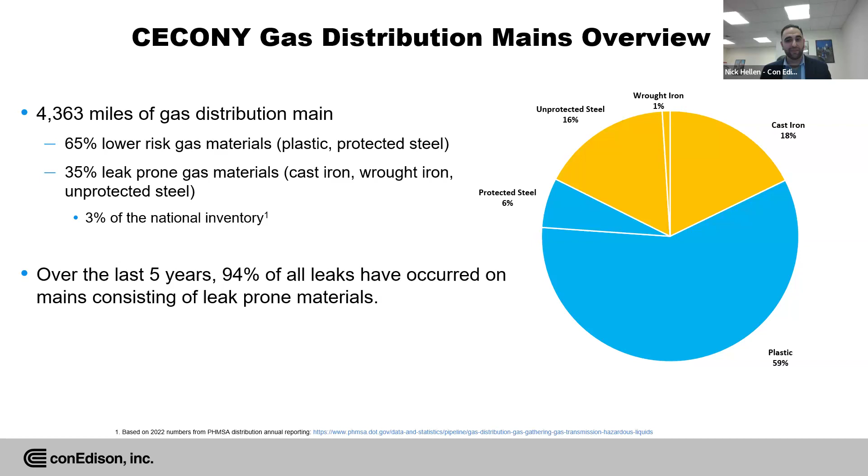So some regulatory context. We have the Climate Leadership and Community Protection Act, which was effective January 2020. Some of the major tenets behind that are we're looking to reduce GHG emissions 85% as compared to our 1990 levels by 2050. And then we're also looking to, by 2040, have 100% renewable electricity within New York. So you can imagine those are aggressive goals.

So a lot of what I'm speaking about is how we meet those goals within what's defined in our gas long-term plan, which was released last year. I did share the link for that. It has a lot of information in it. Obviously, I'm not going to cover all of it, but I'm going to cover some key points in the next 10 minutes or so. So let's go right to it.

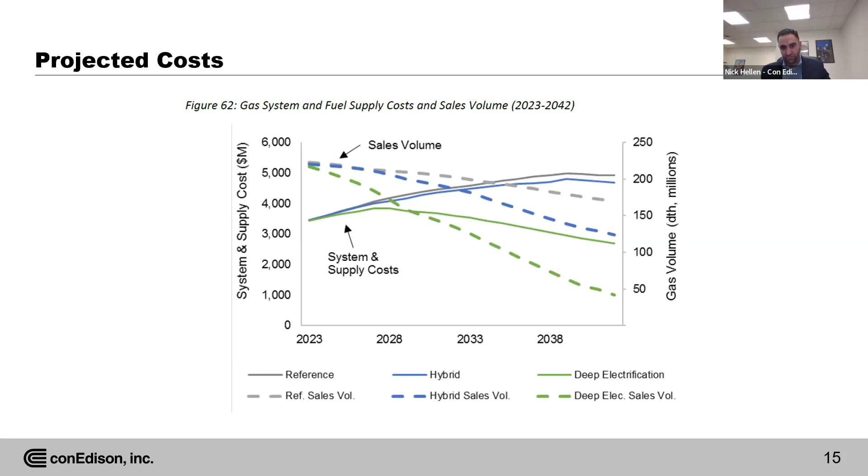Obviously, we can't do that to the remaining customers. So one thing we applied here is changing our depreciation rates from our current 2.6, approximately, all the way to 10.5, which allows us to collect on the rate base earlier in the process while the customers are still on the system. This is something all utilities need to think about if we go down one of these pathways and our customer base decreases significantly. I wanted to mention this as a potential tool - not the only one that could be used, but it was part of our conversation leading into this presentation.

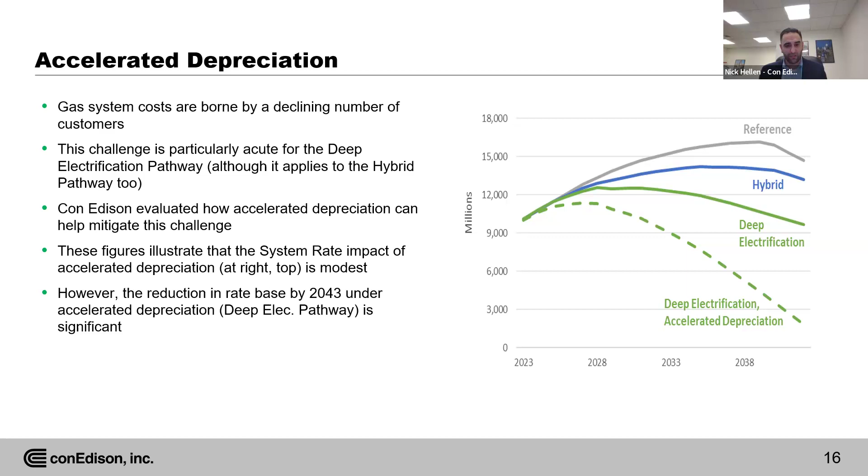So if we could go to the next slide. Another thing I wanted to bring up is NPAs - non-pipeline alternatives - and what tools we have to shrink the system. I want to discuss some of the tools we have today at Con Edison to do that. First, the process for NPAs is identifying our system needs, which is done through infrastructure planning. I'll bring up the two types of NPAs we have on the next slide.

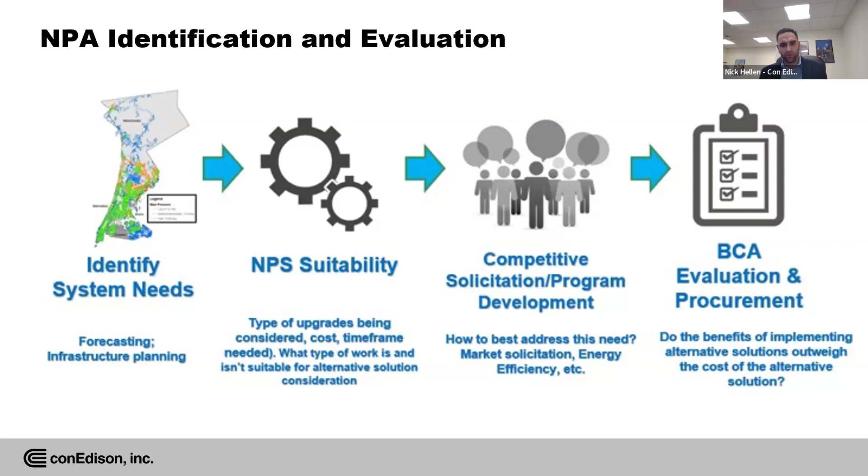After we identify our needs, we do what's called a suitability criteria - we look at how long it will take to actually implement the alternative tools and solutions for our customers. We put it through competitive solicitation and program development to determine how we best address this need. Then it finally goes through a BCA, where we weigh the benefits of implementing the alternative solutions versus their cost. Let me go into slightly more detail on the next slide.

So here are some existing NPAs we currently have at Con Edison. Our first is our gas main replacement program.

So we were speaking earlier about a leak-prone pipe. Instead of replacing a leak-prone pipe, we're offering incentives to those customers on that pipe to get off of our gas system and to be electrified. You see some of the tools and appliances down below with these nice pictures. We're really only targeting at this point radial mains that have a low number of customers, 1 to 5, because as you put more and more customers on this program, it'll be more and more difficult to not have to replace that pipe. So we do have that underway.

We do have a couple of successful radial mains that we're going to look to abandon with this program. But again, really small at this point. We're going to look to continue to develop that.

A larger way to look at NPAs is through our gas distribution system reinforcement program. Wherever we see a need to grow the system, for example putting in reinforcements, doing a retrofit on a regulator, doing some type of work — that's what we consider a traditional solution. Instead of doing that traditional solution, we go out to an area, and we have an example here.

This is the Soundview area in the Bronx. We're incentivizing customers to take both gas efficiency measures and electrification measures so that we don't have to do that reinforcement. So this is a way to kind of balance that out.

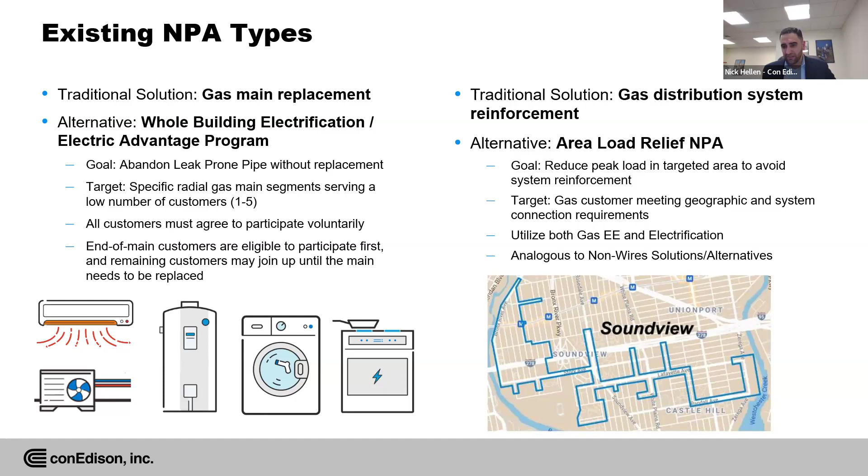Again, we only have a handful of these going on right now, but we're going to look to grow these processes and tools as we move forward, thinking about how do we naturally shrink the system and get customers off our system so that we're using less fuel to meet those longer term goals.

Next slide, please. So this is the last slide. What are our policy priorities? First is really around safety, reliability, and resiliency. No matter what pathway, no matter what we do, that's number one.

Secondly, we have reducing the capital investment in the system by gradually reducing the gas footprint. That's shown through our NPA program, and that's one methodology to do that.

We're also looking to emphasize the importance of system reliability during the clean energy transition. As I showed in the slide earlier, you're going to have a large impact on the electric system while you do this as well, so we really have to take that into consideration.

We're also going to continue to advocate for significant increases in energy efficiency, because no matter where we go, no matter what we do, that's going to help either the gas system or the electric system, and for that matter the steam system. So we're going to look to continue that — that's a win-win for everyone.

So that's what I have, and hopefully we get to speak a little bit later as well. Thank you.

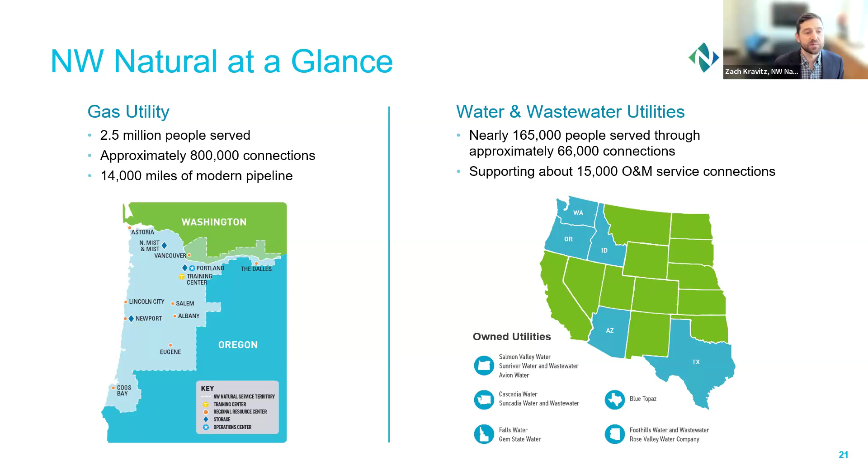On the right side of this screen, I have our map of our water and wastewater utilities—not the topic of the day, but I wanted to highlight that. We're new to this space; we acquired our first water utility in 2017. We now own and operate over 25 systems in 5 states. It's not the topic today, but it's something I'm really passionate about: the growth of this industry, the fragmented nature of water utilities throughout the country, and I'm really proud of how that platform has developed. But I'll get back to gas.

I wanted to start with Northwest Natural's system snapshot. I think each gas system is going to have a little bit of a different story to tell, and they're all unique with their own challenges. There's probably a 100-year story that brought us to today, and where each system is headed. For us, that's unquestionably true—we're 165 years old, a little bit older than the state of Oregon.

We get all of our gas supply 60% from Canada, 40% from the Rockies. We've got Williams Pipeline coming down through our system—that's the major interstate pipeline serving our territory. We have 2 LNG peaker plants and an underground gas storage facility, which is an incredibly important resource for our company. We have just under 12 BCF of gas storage serving our customers, and that's what we really lean on and rely on during those cold winter spells we get out here in the Portland area.

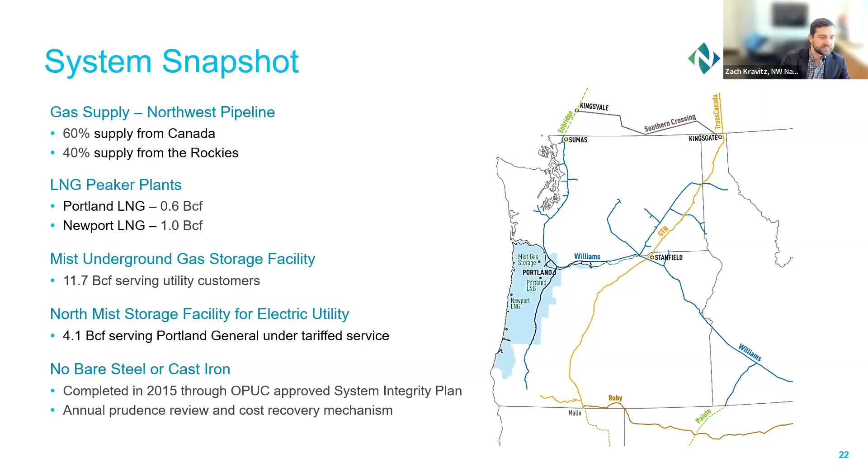Jump to the next slide here. So I mentioned that 90% of our service territory is in Oregon, so I'm going to focus on Oregon right now. And really, this goes to what I talked about. All of a sudden, we're becoming a decarbonization company. And in Oregon, all of this is new. It's complicated, it's very ambitious.

For gas utilities in particular, there's a lot of uncertainty. Until December 2023, natural gas utilities were subject to the Climate Protection Program, which required us to reduce our covered emissions 90% by 2050. This rule was invalidated by the Court of Appeals on procedural grounds in December 2023. It had been an active rule for a couple years, and then got through the court system and was invalidated. But the Oregon DEQ is working to reestablish that program now.

On the other side of the energy equation is the Oregon Clean Energy Plan, which electric utilities are subject to. This requires electric utilities to be 100% clean by 2040 - 100% clean in about 16 years. So both systems right now, gas and electric, are on incredibly steep declining emissions trajectories, and both systems are going to require monumental investments, or at least creative strategies, to do what is being asked of us. It is huge. So I wanted to point that out in how we're now thinking, okay, we've got to be a decarbonization company.

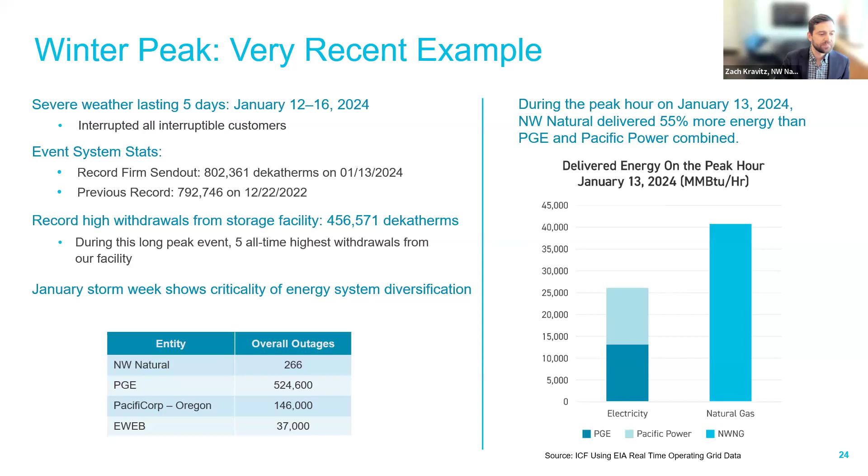So with that, I wanted to share what the CapEx profile looks like for our gas utility right now, given some of the demands on our system.

I sometimes speak of these in terms of discrete and non-discrete capital. Discrete refers to projects that don't come around very often—maybe a 1, 2, or 3 year planning horizon for some large capital project. On the non-discrete side, that's things like vehicles or equipment. I can't tell you exactly when we'll buy a new F-150 or which exact truck, but I know we'll replace a certain number of trucks every year, and that makes up part of our capital profile—that's the non-discrete, run rate capital.

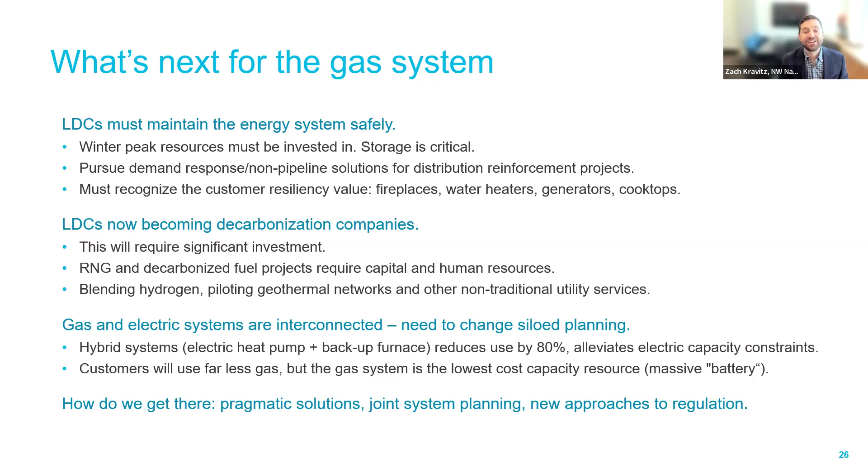So one more slide. Thank you so much for bearing with me as I go through all of this, but I want to talk a little bit about our approaches to some proposals we have. This is again a mindset change for a gas utility, but we want to embrace the low use customer while protecting our existing customer base. So how are we thinking about that?

Well, I said that new premises are using 200 therms less than our existing customer base. So there's an issue there. Are we recovering the full amount from that customer that would be expected through their volumetric rate? The answer is probably no. So what does that mean? That means our existing customer base could be, to some extent, subsidizing a new customer from year to year. And we want to change that.

We're proposing a higher fixed charge, a significantly higher fixed charge for a new premise that comes onto the system, because we know we're not going to get the volumetric margin from them.

The other thing we're doing is proposing a low use line extension allowance, which provides a higher allowance for low use customers. Again, this is breaking that link that's always existed between a line extension allowance and throughput. We're doing that in our economic analysis used for an LEA, and our commission told us to do this, so we're taking a directive here. But it really plays out well in an economic model where if you assign the full environmental compliance cost of a new customer on day one.

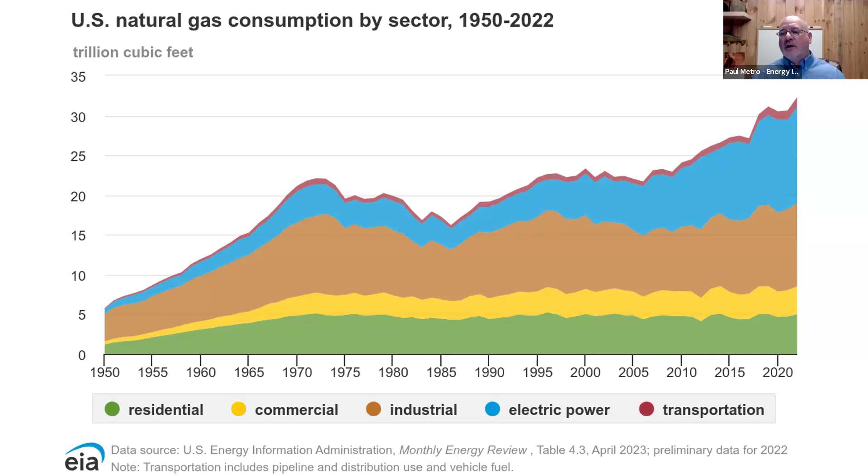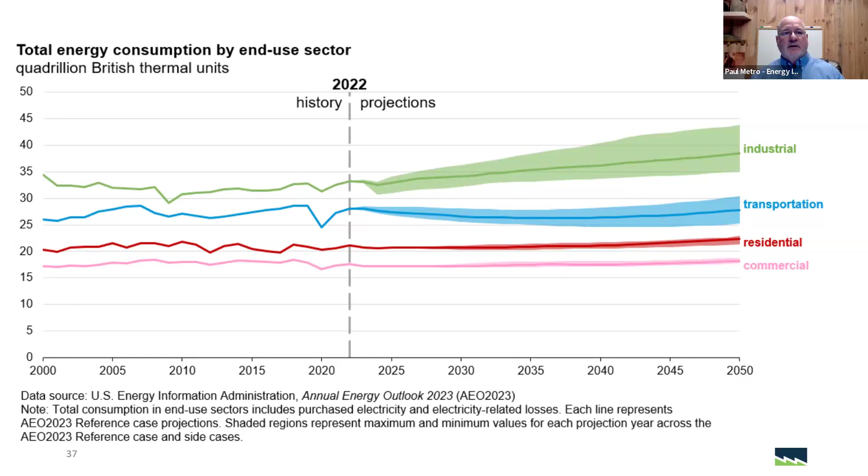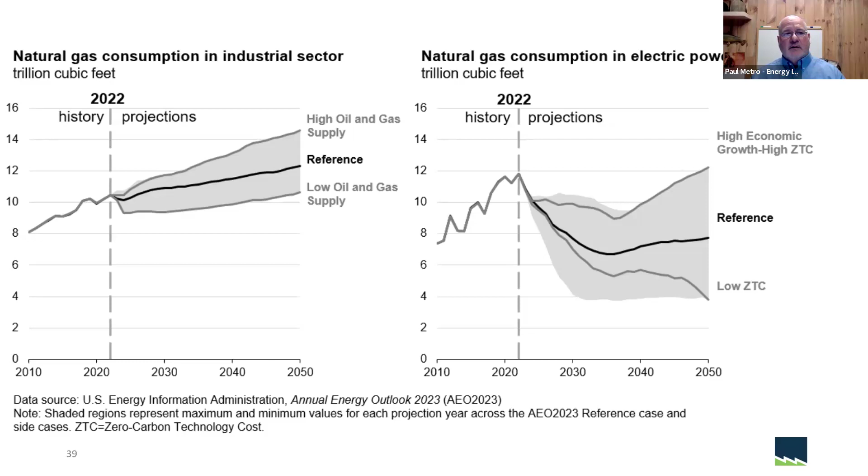Next slide. In Pennsylvania, and this is critical to most of the gas producing states in our country, the API recently put out a statistic for Pennsylvania. Essentially what it says is that the oil and gas industry supported more than 420,000 jobs in Pennsylvania and contributed over 75 billion toward our state's economy. That's an incredible effect on our economy. We can't just throw natural gas away.

There's so many people dependent on this, and our economy in Pennsylvania is dependent on it. We need a robust natural gas system for the future.

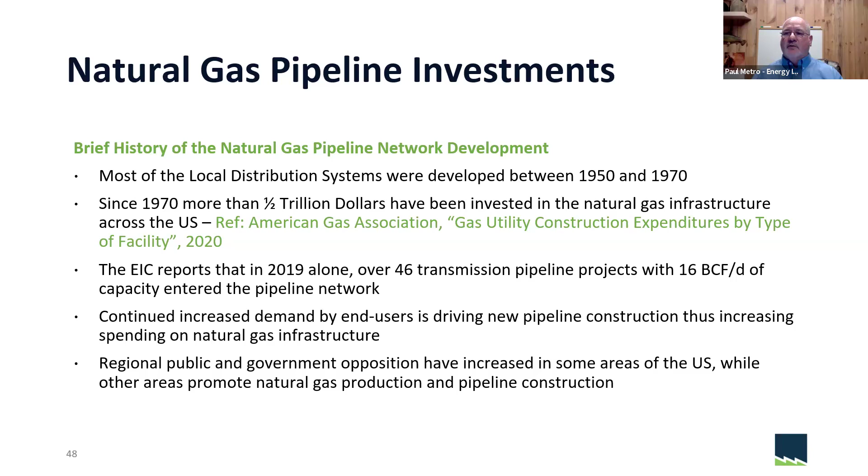After the San Bruno incident in California and the Allentown incident in Pennsylvania, there was a call to action that talked about pipeline safety. I testified in front of the National Transportation Safety Board for San Bruno, and the NTSB was pushing very, very hard, very firmly to the Pipeline and Hazardous Materials Safety Administration, PHMSA, that they needed to get onto this integrity management. They needed to replace risky pipes, the cast iron, bare steel, and the new generation, the old generation plastic.

So as part of that, and what came out from that, we'll see some stats that risky pipes decreased dramatically from 2009, 10, and 11 timeframes, and it was driven by what occurred at San Bruno and Allentown. In Pennsylvania in 2011, we had identified about 13,000 miles of risky pipeline. The average cost of those pipes to replace per mile is about $1.1 million. Tremendous amount of money needed for that. The pipeline mileage now in Pennsylvania, after we implemented a pipeline replacement program, is down to about 9,500, 9,000 miles. That's a great progression as to where we were, but we still have a lot of work to get out the risky pipe here in PA.

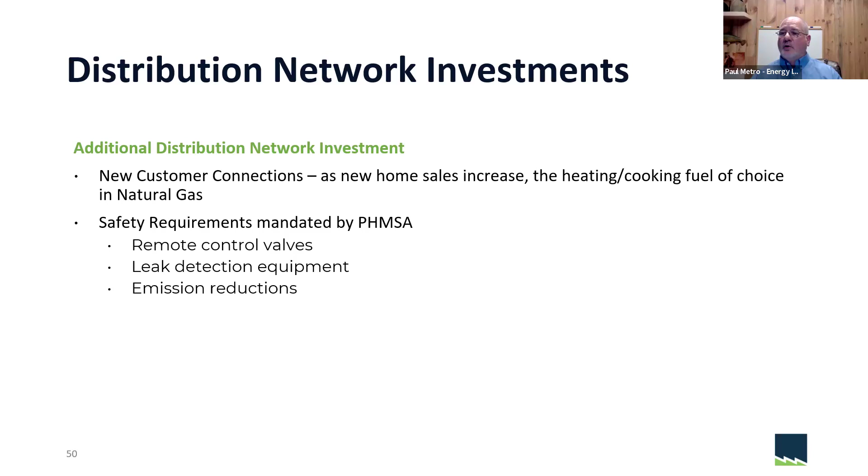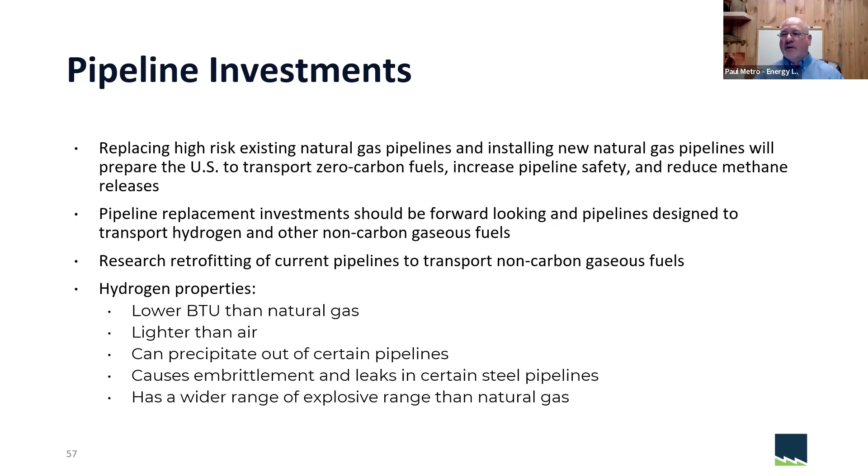Natural gas explodes between 5 and 15% of gas in the air, while hydrogen's range is around 5 to 76%. So hydrogen is extremely explosive, and you have to be cognizant of that as you develop and put hydrogen into these zero carbon pipelines.

This is what I live for right now: workforce training. U.S. Secretary of Energy Jennifer Granholm has been to the Energy Innovation Center several times. She loves coming to the building, and she talks about some of the challenges in an energy transition. She talks about how we have to look at training people—that's going to be the key to getting to this transition. That's what we do here at the Energy Innovation Center, the Infrastructure Academy.

The only restraint in the clean energy transition is the trained workforce. You're not going to get any of this transition unless you have someone that can do it. And it's clear to me, and I think it's very clear to the Pennsylvania Public Utility Commission, because they implemented regulations on this, that we need to monitor and look at workforce development.

Why shouldn't the workforce mirror the service territories in which they serve? For example, Lancaster, Pennsylvania has about 44% Hispanic population. Why shouldn't the utility that provides gas service there have about 44% of their workforce as Hispanics? Those are the kind of issues that will be key to public utilities across the nation as they look at this transition. Don't just look at reducing our carbon footprint, but how can we take advantage of this and help disadvantaged communities?